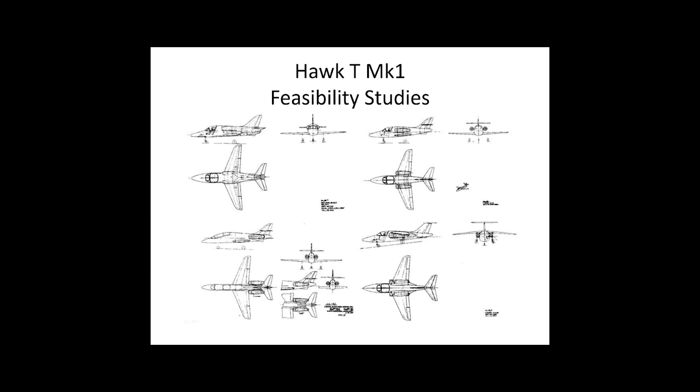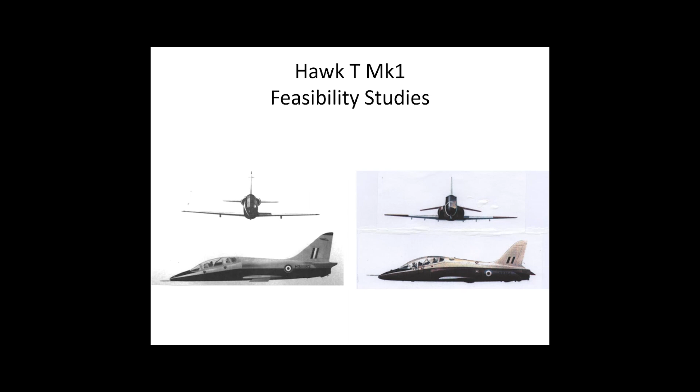There were a lot of different feasibility studies in the late 60s and early 1970s, but in the final concept design, you can clearly see the Hawk recognisable. This was accepted, as we said, in late 1971, and this led to a production contract early the next year for 176 trainers, with the first to be delivered in late 1976.

The first Hawk T1 flew on the 21st of August 1974 with test pilot Duncan Simpson at the controls. Now, the Hawk is not merely a good-looking aircraft. It's agile, it handles well with clean, responsive controls, and I can confirm that it's easy and great fun to fly.

It's capable of transonic speeds in a dive. Air tests that I've flown on typically achieve 0.96 to 0.98 Mach in a dive without any difficulty at all, but this apparently came as something of a surprise to its designers. It also has good range and endurance, and is economical to operate, but getting more expensive to maintain, as we'll see later on.

The first Hawk T1 to be formally accepted by the RAF was delivered in November 1976, with the last delivered in March 1982. As might be expected, some deficiencies were uncovered after the Hawk went into service. Some faults, such as a nose wheel that swiveled poorly, were corrected in later development, and some economy measures, such as low-cost radios, proved unacceptable in practice and had to be upgraded later on. But by the time of the last delivery, the Hawk had become the BAE Hawk, since Hawker Siddeley had been absorbed into the British Aerospace Group in the spring of 1977.

I've got a short video here, which is a bit of a promotional video for the Hawk at the time. So it's a little bit dated as a video, but it gives you a good idea of the background and development of the aircraft.

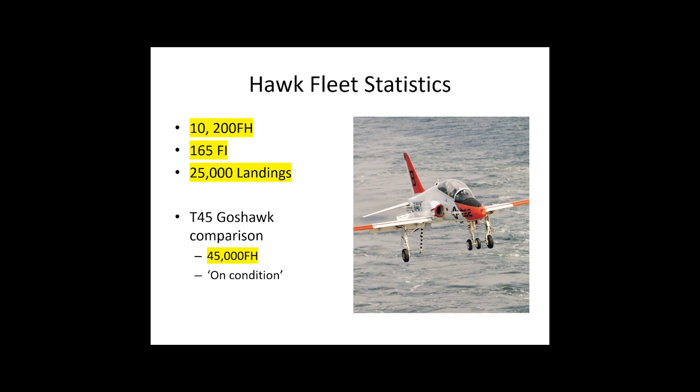Just an interesting comparison to the US Navy's Goshawk fleet here, which has now got a 45,000 hour flying hour life, and it's maintained on condition, so a very different philosophy, and that's now under the design organisation of Boeing rather than BAE. But interesting to compare the two philosophies and how far into the future the US Navy are planning to operate their T-45 Goshawk. But of course, Trigger's broom is probably very true for the Hawk.

Pretty much all of it's been replaced over the years. So while we say the aircraft is approaching 50 years old, parts of it may be, other parts probably aren't. So it certainly is a bit of a Trigger's broom of an aircraft.

But to extend the OSD out to 2010, the Hawk Authority introduced Mod 2010 to replace the centre and rear fuselages with new items of a later design standard. All the existing installations and equipment were transferred to the replacement centre and rear fuselages. The programme ran from February 2000 to February 2003 and modified some 80 aircraft.

Whilst most of the active fleet had been through the modification programme, a number of pre-Mod 2010 aircraft remained in service till quite recently. And they're not going to be aircraft that end up soldiering on for another decade or so, but interesting to know that they were still around until fairly recently.

With a current out of service date of somewhere in the region of 2027, possibly 2030, possibly going beyond 2030 to 2035 for some of the aircraft, to be decided, the Hawk T1 aircraft will theoretically be at least 54 years old, or possibly approaching 60 if it goes on to 2035, as David said at the start.

So in total, 176 aircraft were delivered, as we said. A significant number have been written off or damaged beyond economical repair since entry to service. Between 1983 and 1986, 88 Hawk aircraft were modified to extend their role to include a limited air defence capability. Mod 680 made provision for the use of a Sidewinder air-to-air missile or a BL-755 freefall bomb on each of the wing pylons, although it's never actually been used in anger.

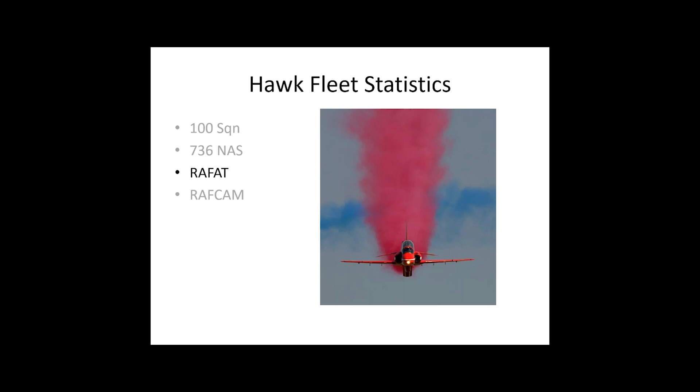So for the Red Arrows, they operate from RAF Scampton, as I'm sure you're all very well aware.

RAF Leeming operates the T1 in the aggressor training role and to supply exercise and training support with 100 Squadron, including support to the Joint Forward Air Control Training and Standardisation Unit, or JFACTSU.

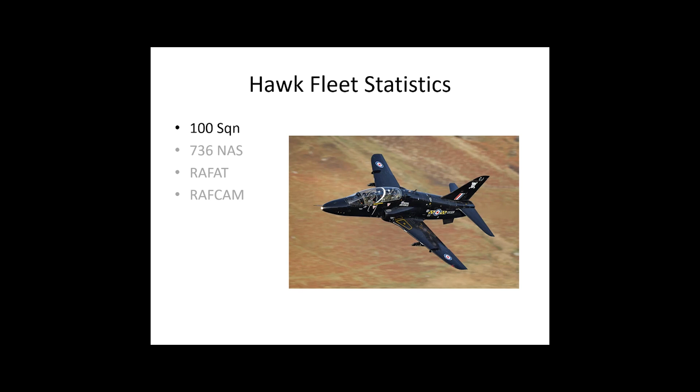Royal Naval Air Station Culdrose operates the T-Mark1 in the maritime aggressor training and attack simulation role, and to supply exercise and training support with 736 Naval Air Squadron, formerly the Fleet Requirements and Air Direction Unit, or FRADU.

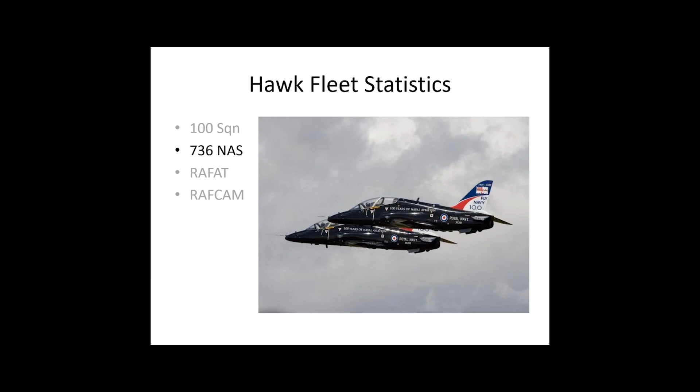The RAF Centre for Aviation Medicine, or RAFCAM, operates the T-Mark1 at Boscombe Down for trials activities, clinical referrals and high G training. So that brings us up to date with fleet disposition, history and usage.

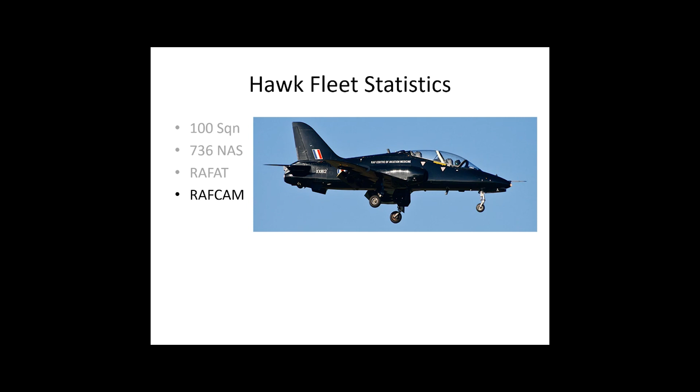Now, while the Hawk aircraft has been subject to carefully managed maintenance over the last 45 years or so to address the known issues, there is still a requirement under Military Aviation Authority regulations, and specifically RA 5723, to undertake an independent ageing aircraft audit.

That's an audit of the Hawk support team, or delivery team as they're called these days, and the airworthiness and integrity management procedures and the physical condition of the aircraft itself.

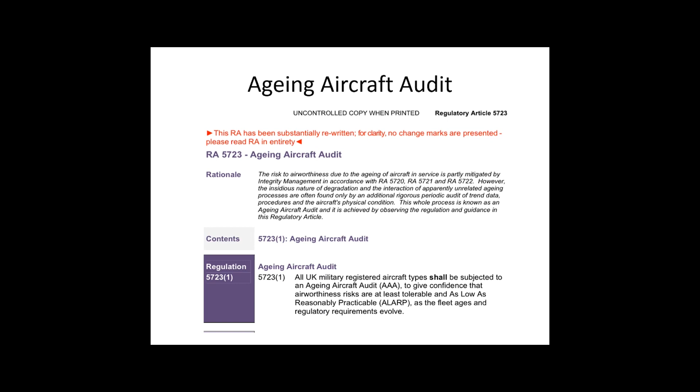It's important to note that the audit is not just an activity on the physical aircraft, but it focuses very closely on processes within the CAMOs and delivery teams, the qualifications of individuals who have delegated airworthiness authority, the effectiveness of meetings, the accuracy of documentation, and logistics information systems, and so on.

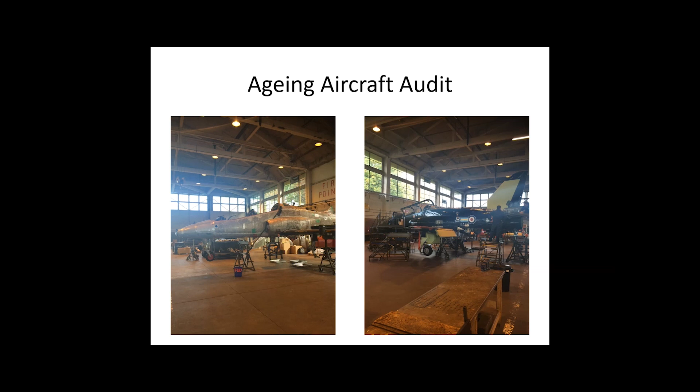The purpose of the ageing aircraft audit is to ensure that age-related problems have been identified, predicted where possible, and mitigated prior to their having a major impact on airworthiness, safety, capability, or cost of ownership, thereby providing assurance that the platform can continue to operate without an increase in risk to the platform or individuals operating it.

The ageing aircraft audit, as outlined in the regulatory procedure, shall be undertaken by a contracted organisation with suitably qualified and experienced persons, independent of the Hawk delivery team, the continuing airworthiness management organisations or CAMOs, the design organisations and other maintenance organisations. So it's an independent audit that needs to take place.

And the most recent AAA, if we call it that, on the Hawk T1 comprised of 3 basic groups of activity. Firstly, the Hawk delivery team undertook scoping of the AAA using the RA as guidance, but it's very much up to the Hawk TAA to decide on the breadth and depth of the audit.

Secondly, the chosen AAA contractor undertakes the AAA itself and zonal hazard analysis tasks. The AAA tasks themselves comprise process and procedural audits of the Hawk delivery team management systems, a physical condition survey of a number of aircraft, and the compilation of a final AAA report. The zonal hazard analysis will consider physical proximity, component system interaction, inadvertent operation effects, environment, and danger to personnel.

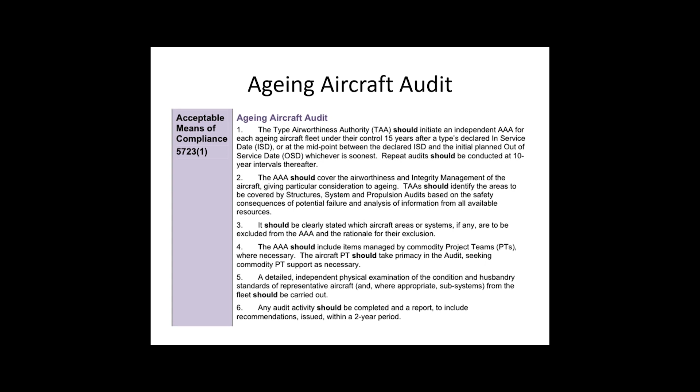Although not mandated at the time of the last AAA, zonal hazard analysis, or ZHA, is recognised by the MAA as an important technique for identifying and analysing credible zonal hazards, and it was used extensively to inform the aircraft safety case argument. In 2015, the Hawk T1 had not been subject to a full ZHA, but the cost and time savings and benefits of undertaking the ZHA in conjunction with the AAA were obvious, so the two were combined, with the ZHA included as part of the overall AAA project.

Completion of the zonal hazard analysis identified potentially hazardous physical interactions between equipment within a zone and/or adjacent zone, and it validated the aircraft design for potential undesirable system interactions, and validated the aircraft build manufacture standard, and to a certain extent, maintenance standards as well.

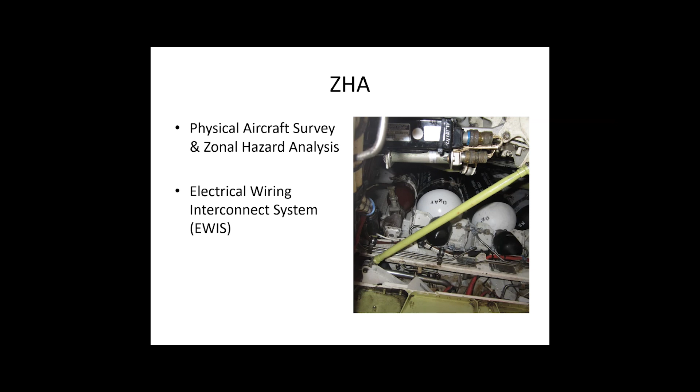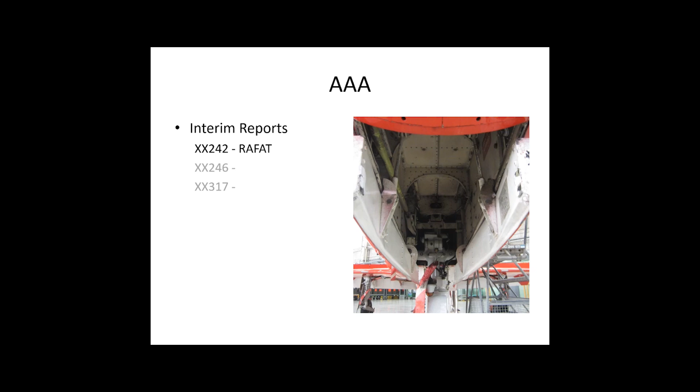I've got a few slides here which show some of the areas that were inspected, and some of the findings that were made through the AAA physical surveys.

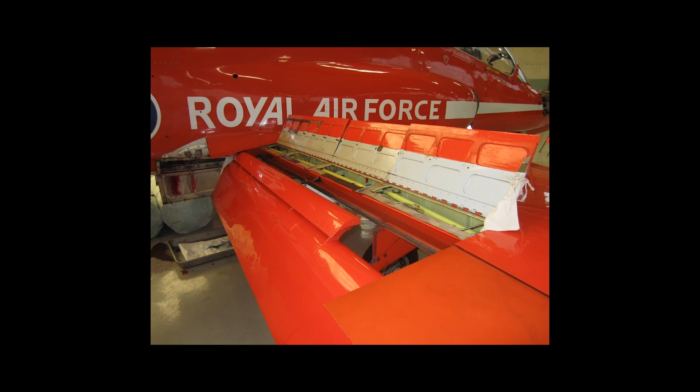One of the aircraft that was looked at was a RAFAT aircraft, one of the older RAFAT aircraft, and it probably looks an extremely clean, well-maintained aircraft considering its age and the use that it gets. Looking very clean and presentable, but nonetheless findings were made that are age related, as you would expect.

If I pick out some of the more typical examples: excessive corrosion on some of the structural elements, some of the bolts and components that we found. Perhaps to be expected, but again, not acceptable for an aircraft that's in service. So some of the findings reflected those kinds of things.

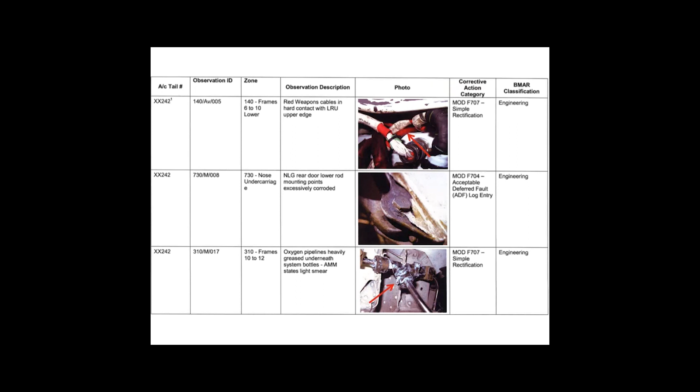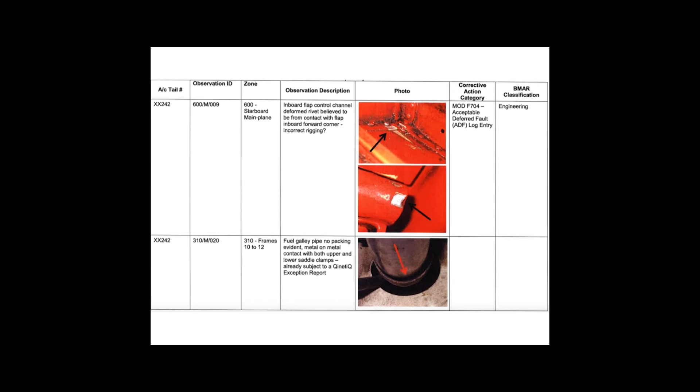There's evidence of historical chafing, or historical contact between different components or pipework potentially, again all subject to investigation and rectification.

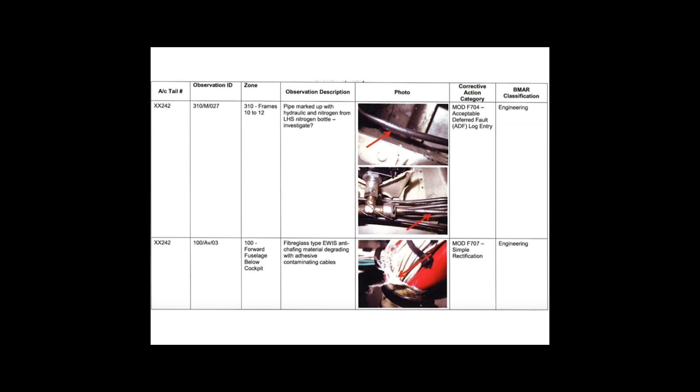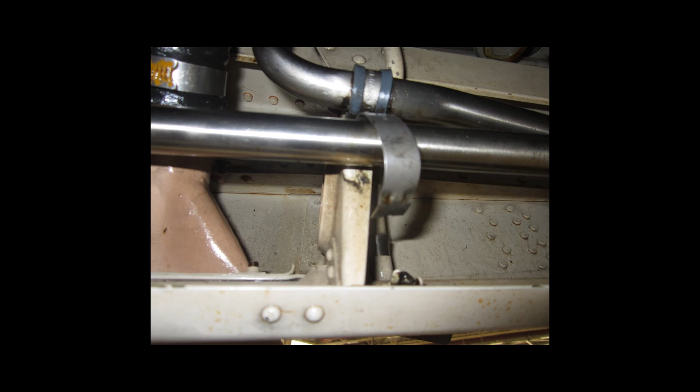The engine and the area around the engine was also inspected for similar things. You can see that one of the retaining clips for a run of pipework had fractured, and that was found during the audit.

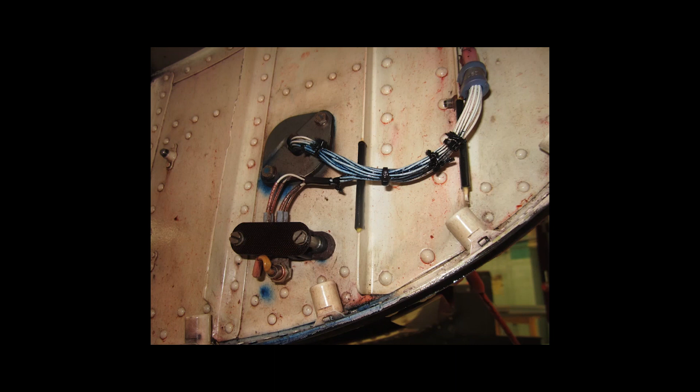Something fairly typical on a Red Arrows aircraft is the coloured dye—it gets everywhere, quite literally, and you can see on the wiring that it's been contaminated by coloured dye, which is obviously highly undesirable.

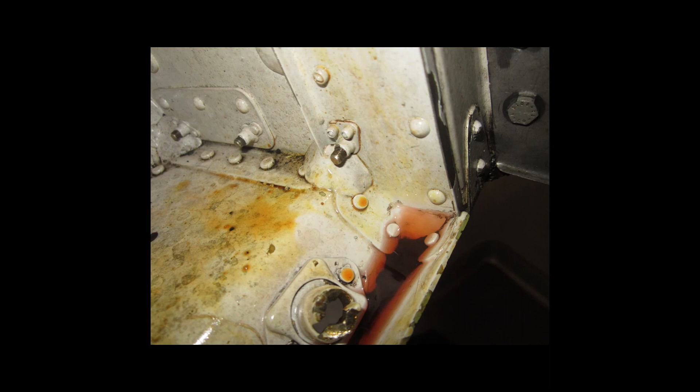You can see evidence of perhaps oil and water—something at some point has had a leak, and the oil has found its way into various areas on the aircraft.

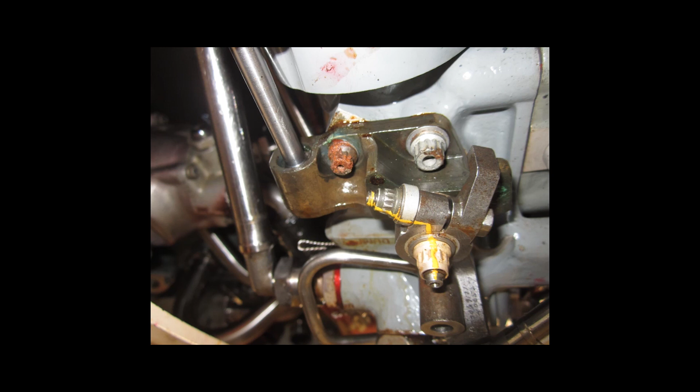You can see again evidence of corrosion to some of the bolts, which would need to be clearly replaced.

For the EWIS—and I'll explain what that is—during my time in the Hawk TAA, Defence Science and Technology Laboratories, or DSTL, set up and funded a long-term electrical wiring interconnect system, or EWIS, programme. It's a cradle-to-grave programme managed, coordinated and carried out generally at the same time as an AAA, but not always. It was managed at the time by a company called Cable Connect Solutions.

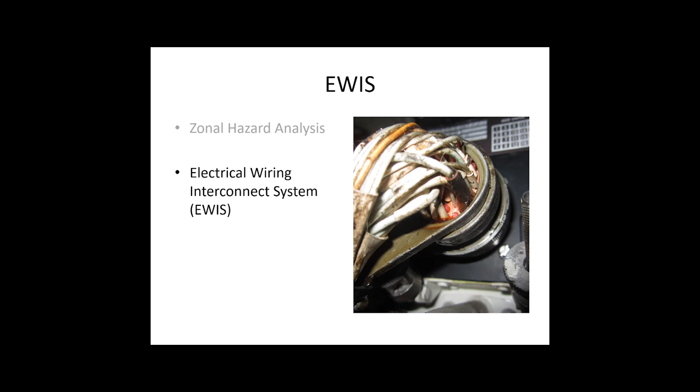Each EWIS survey considered potential technical failings with respect to installed wires, harnesses, clips, connectors and bonding points. They look at consistency of build standard against the design standard, signs of moisture ingress and corrosion in damp areas, signs of heat damage in hot areas, whether there is adequate protection for the wiring, and things like cable, harness and loom damage for minimum bend, fretting, fraying or abrasion. That's a typical scope for an EWIS.

Overall, the EWIS itself identified a high volume of age-related husbandry and condition issues, most being typical of the kind seen on a 50-year-old aircraft, but very few of which were an immediate airworthiness concern, despite what you can see in the following photos.

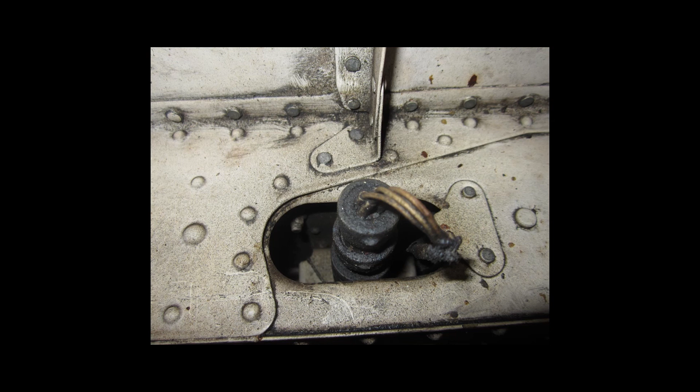Obviously electrical connectors that are extremely dirty, probably haven't been disturbed for many years, but that's fairly typical of what was being found on a 45 or 50-year-old aircraft.

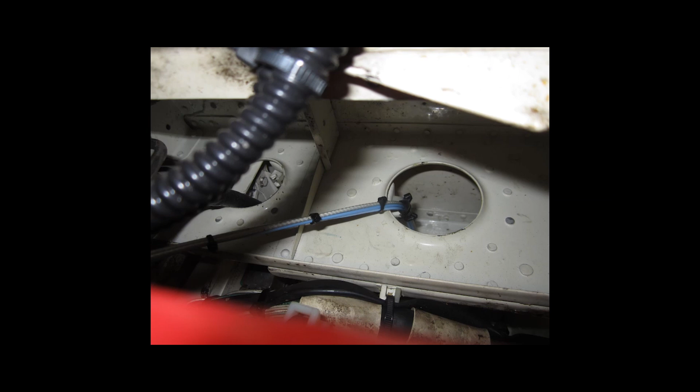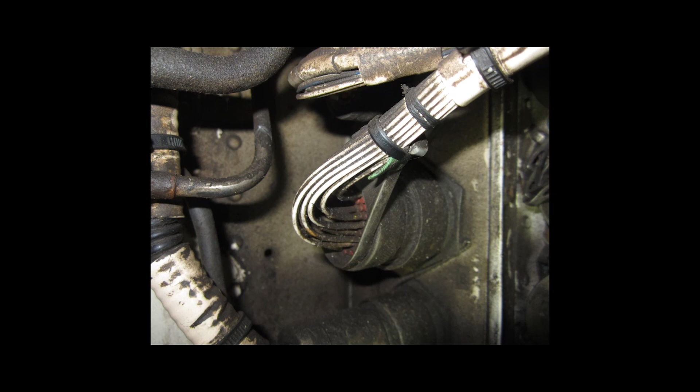There you can see how the cabling is chafing on the edge of a lightening hole, again probably fairly typical of an old aircraft with the dirt and grime of many years of operation finding its way onto connectors.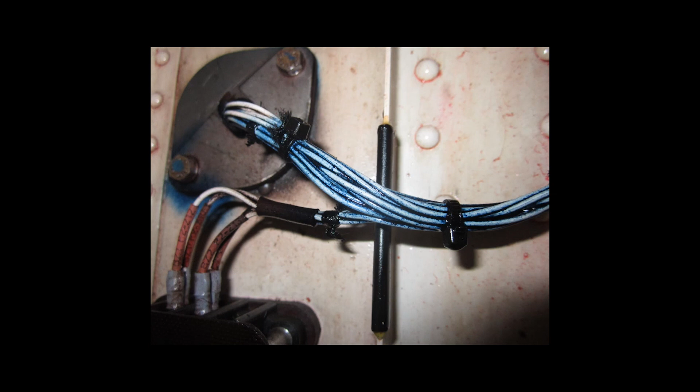And probably a close-up of the earlier photo of the dye contamination on one of the Red Arrows aircraft.

So, moving on, we'll come back to this picture later because the observant among you will notice that these aren't Royal Air Force Hawks, but we'll come back to that picture later on.

So we've had a look at some of the challenges that sustaining a fleet of aging aircraft can cause. But what about capability sustainment? How do you keep a 50-year-old analog aircraft relevant and useful when the world around it is digital and computerized?

Legislation and regulation changes demand that certain equipment upgrades are carried out. Safety recommendations from numerous service inquiries and boards of inquiry require technically challenging modifications. Societal and reputational concerns demand that technological advances in safety are incorporated on all aircraft. The time, cost and trouble required just to keep the Hawk T1 aircraft relevant is considerable, and it's not an insignificant undertaking.

There are competing forces that all need to be considered. The requirement itself - legislation, regulation, safety, capability, obsolescence, and things like that. You need to consider what is technically feasible or possible. If you think about the aircraft real estate and the architecture of the aircraft, there may be things you'd like to do to it that you simply can't, because the aircraft itself doesn't make it possible.

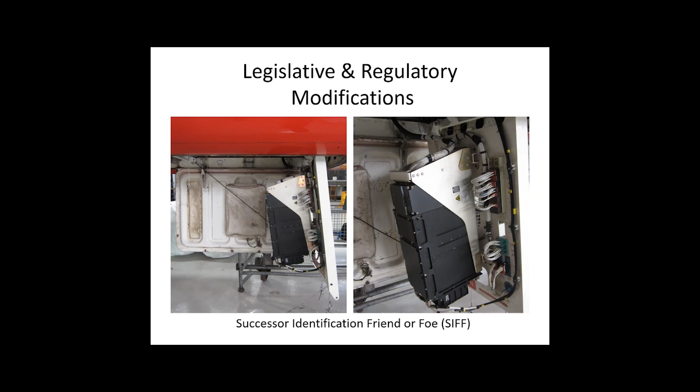Collision warning system: the imperative for fitting Hawk T1 with a collision warning system was driven from the Moray Firth Tornado mid-air collision a few years ago.

During the concept phase, it was highlighted that the CWS had different Hawk project dependencies for the different potential solutions. In 2015, one proposed solution was dependent on the embodiment of the SIFF modification in order to free up space to fit the processing unit. Given the problems already discussed with the SIFF solution, there was a reluctance to tie in the high-priority CWS project with another technically and commercially complex modification. However, another proposed solution from a different supplier was dependent on the attitude heading and reference system modification embodiment. So to an extent, two of the three proposed solutions had dependencies and critical paths linked unavoidably to other projects. The third solution, from another supplier, was undesirable.

At the time, if the GPS and CWS projects were procured separately, they would need to be sequenced, with a delay to the GPS project. Essentially, this is because of the dependency that exists between the GPS and CWS for at least one of the CWS solutions considered during the concept phase. In other words, if they were to be standalone designs, then in order to achieve integration, the CWS design would need to be completed prior to the GPS solution, in order to specify the integration requirements between the systems.

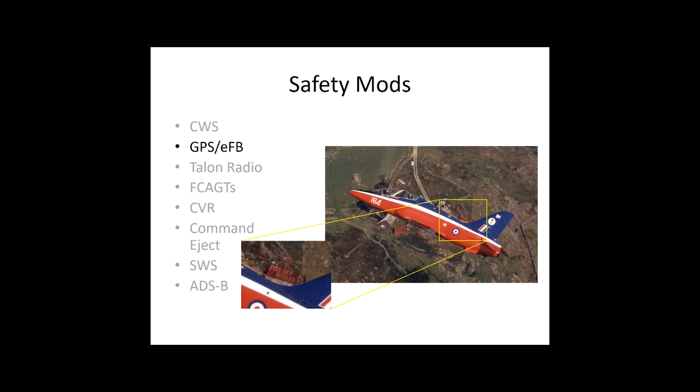Or maybe not. And the image I have in my head there is of a street map of London with an arrow that says 'Buckingham Palace this way.' Who knows?

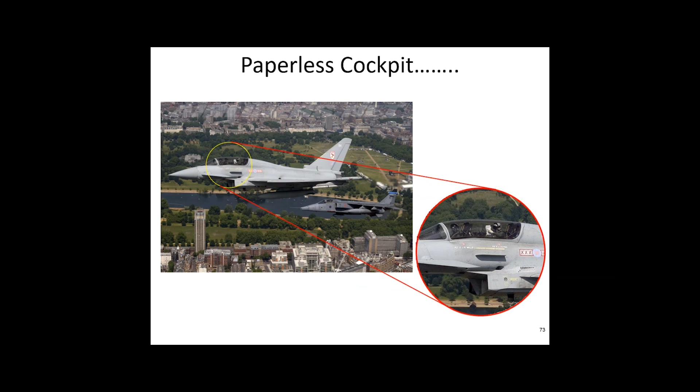The existing Hawk T1 SkyMap 2 GPS, as seen here on a Red Arrows aircraft, was installed under a service engineering modification, or SEM, and cleared in the release to service with limited evidence. A review highlighted issues with the existing system, specifically that the human-machine interface is not very effective and is time-consuming, resulting in additional heads-down time in the cockpit. This reduces situational awareness and contributes to the risk of controlled flight into terrain and mid-air collision, which are the duty holder's highest operational risks.

Originally, there were two options being considered for a replacement GPS solution. Option one was to pursue a combined solution for the CWS and GPS systems, as discussed earlier. This is important given there would likely be cost and operating benefits to having both systems blended into a single solution. However, building on the CWS discussion, there were some real challenges with the blended approach.

Firstly, integration of the systems into an already confined cockpit layout was not simple. Secondly, integration would need to ensure both GPS and CWS information could be transmitted on the same display. It's since been recognised that there are significant challenges due to limited space within the cockpit to accomplish pilot interfaces to both CWS and GPS systems independent of each other. Additionally, having multiple displays and warnings could add to pilot workload, requiring the pilot to scan multiple displays and respond to different alerts, increasing the likelihood of human error through confusion, distraction, or incorrect responses.

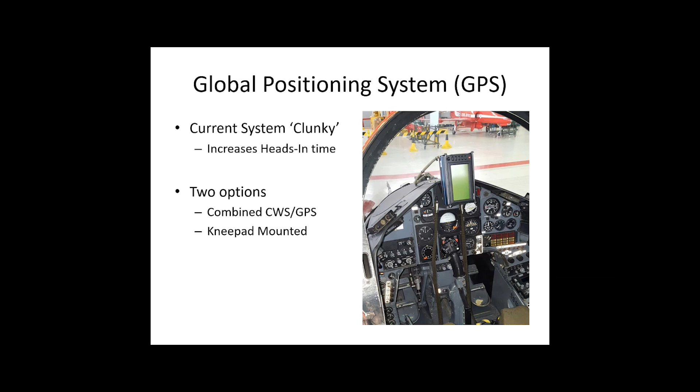So let me bring this to life a little bit for you. If we look at modern traffic collision avoidance systems, or TCAS, in modern airliners, a few years ago TCAS systems may have only provided a beep or a message saying, 'Warning, warning.' The pilot would have to consider the warning, comprehend what it was, and then take action accordingly. This decision loop takes time and therefore increases risk. So improvements were made to TCAS systems so the warning became more specific, for example, 'Traffic, traffic,' so the pilot has comprehension of what the warning is and can act more quickly, reducing the time taken.

More recently, TCAS systems have been upgraded further to give the pilot a command rather than a warning, for example 'Pull up,' which takes the pilot straight to the end of the decision loop and instructs him what he needs to do. However, this still relies on the pilot to take the correct action and react quickly whenever the TCAS system gives an instruction.

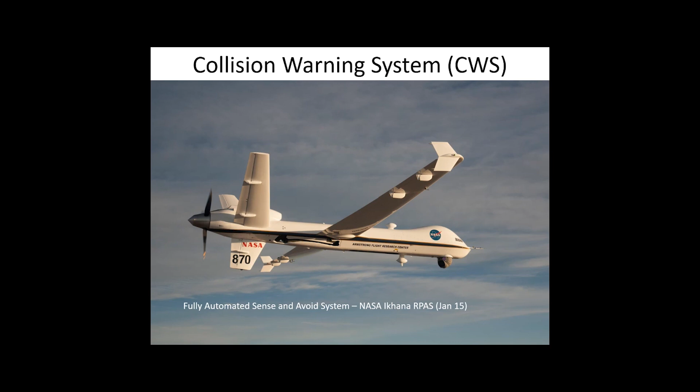So in 2021, the preferred GPS solution is now a standalone tablet solution brought into the cockpit as carry-on equipment, with appropriate clearances to support its use. Some of the biggest challenges outstanding include glare on the canopy or windscreen during night flying and integration with mission planning software. But as with CWS, there is a viable and mature technical solution that is working its way towards embodiment on the Hawk fleet.

Other modifications being considered under the Capability Sustainment Programme include upgrades to existing radio equipment, improved full coverage anti-G trousers similar to those worn by Typhoon pilots, cockpit voice recording capability, and an automatic parachute harness water activated release system called MWAS. And as a result of the Red Arrows fatal accident service inquiry at RAF Valley in 2018, the feasibility of a stall warning system and changes to the command eject functionality are also being considered.

There are further capabilities needed to meet regulatory and legislative requirements, such as ADS-B out, for example. And it's worth bearing in mind that there are over 40 other minor modifications ongoing, which are all considered to be business as usual.

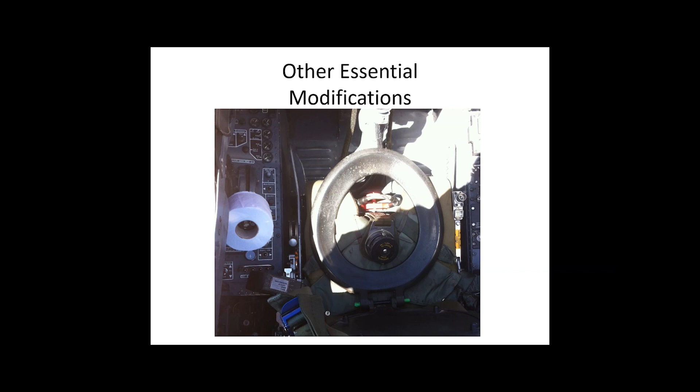But another safety modification that may be necessary in the future is a ground proximity or terrain warning system, or RadAlt. A GPWS RadAlt capability for Hawk T1 has been considered on a number of occasions over the last 20 years. But due primarily to the incremental OSD extensions applied to the platform, the cost-benefit analyses and quantitative data has never provided a compelling business case for the embodiment of such a capability.

Some background: in October 1984, a Hunter aircraft operated by FRADU, Fleet Requirements and Air Direction Unit, suffered a fatal controlled flight into the sea accident. The Board of Inquiry recommended that a RadAlt modification was subsequently embodied on the Hunter aircraft. But notwithstanding further fatal accidents and serious incidents, Board of Inquiry recommendations, the Hawk T1 has never had a terrain warning system embodied.

So a GPWS provides warning to the crew of an aeroplane when the flight path is such that prompt action is required if collision with the ground or sea is to be avoided. The use of GPWS has been widespread in large commercial aircraft since the late 1970s, after a series of fatal CFIT events highlighted the need for risk reduction measures to be enforced. UK CAA guidance was issued as early as September 1976, alongside guidance from the FAA and other regulatory bodies.

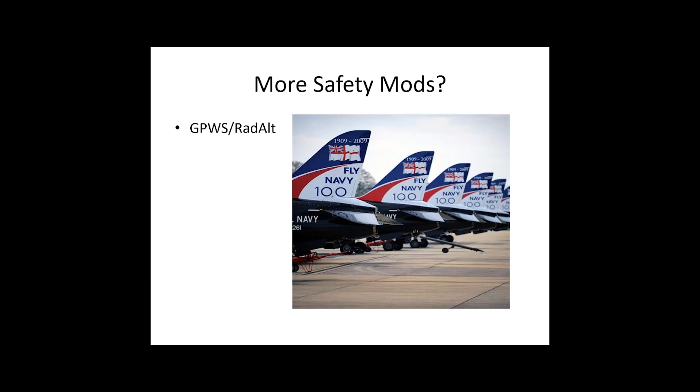Guided by work on the half model, the flap vane on the outer part of the flap was removed to detune it somewhat, at the cost of some maximum lift. Although the initial separation of the flow still occurred at the same point, the flow breakdown at the stall was kept from rapidly spreading towards the outer wing by the positioning of a large fence.

Buffet warning was obtained, at the cost of a little more maximum lift, by putting triangular section breaker strips on the leading edges - inboard to give warning and outboard to give repeatability. You'll see these fitted to Hawk aircraft to this day, and they're known as Toblerones for obvious reasons.

And I can testify personally that they are perfectly positioned to, should we say, tear the arse out of your flying suit when you sit down to slide off the front edge of the wing. That's always a crowd pleaser at an air show.

Clearly there was scope for much more fine-tuning and investigation of more refined stall fixes, but there was a tight deadline to meet to get the Hawk into service in 1976, and this work was left to be done on later developments. A stall warning system has never been embodied, but it does form part of the potential capability sustainment plan for the future of the aircraft.

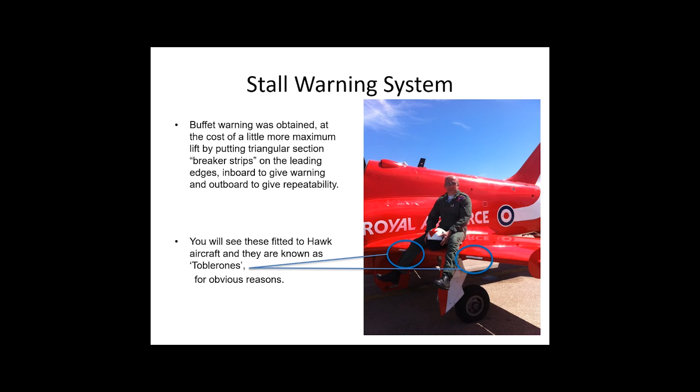So what is the future of Hawk T1? Well, like all aspects of defence, the Hawk T1 programme is waiting on the outcome of the ongoing integrated review, or IR. So the honest answer is that we don't know. But given the complexity of the programme and the considerable time, cost and trouble that will be expended to deliver it, there's no guarantee that the Hawk T1 will survive the IR.

Legislative and regulatory requirements and the safety case for the aircraft mean that doing nothing is not an option if the aircraft is to continue flying. But it also needs to be considered that the capability sustainment programme only really delivers the minimum requirements to make the aircraft relevant and compliant. It doesn't present a massive leap forward. In many ways, it is just treading water.

On the flip side, there is no alternative capability to replace the aircraft. Recapitalisation is always an option, but Hawk T1 has a very limited life without the modifications offered by the capability sustainment programme.